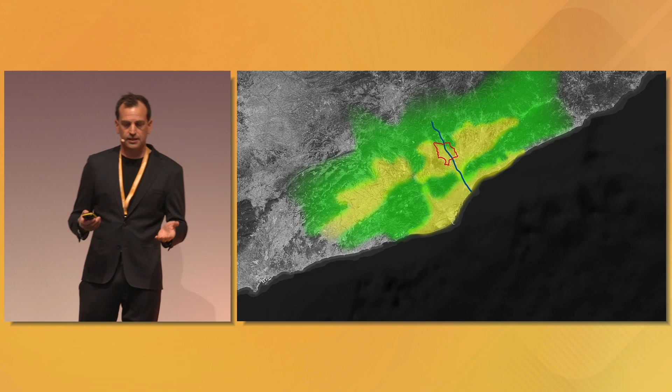It's in the depression area. This green area is a mountain range. Sabadell is placed in a mountain depression, flanked by these mountain ranges, so Sabadell has a special climate. Because of this, and because there's a lot of industrial activity there with high ppms in the atmosphere, the air has to be purified.

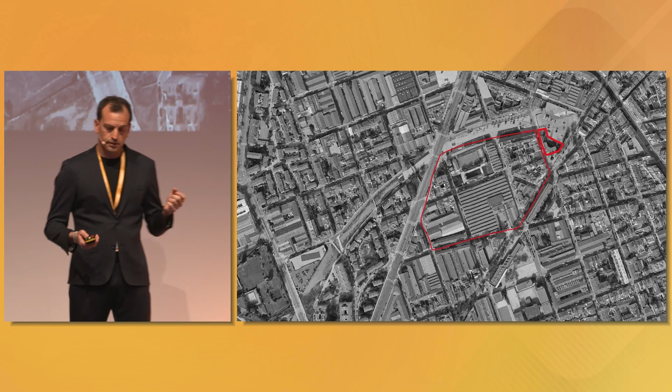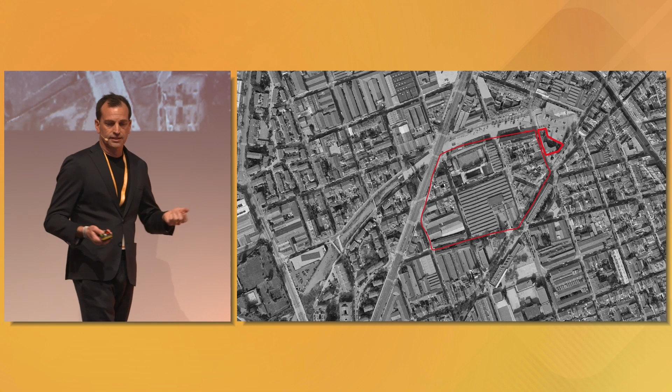If we zoom into Sabadell, I will explain the first radical regeneration of a public building for a social and cultural purpose. Let's start from the beginning. It's a rehabilitation project for the municipality of Sabadell. The small plot is the project plot, and the big plot was an old textile factory. Sabadell was known in the 19th and 20th centuries as the Manchester of Spain for its high activity in the textile sector. This is a historic picture of the factory, and this is our building.

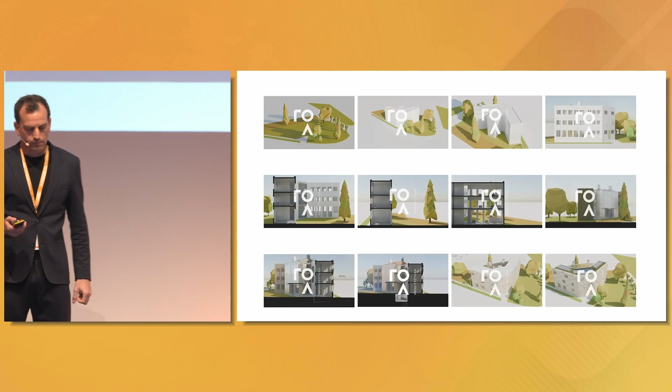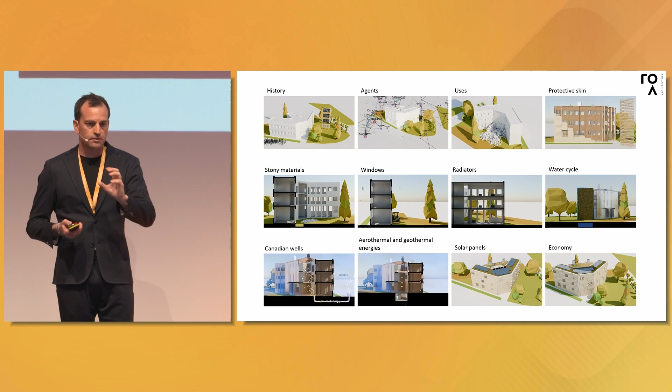At the beginning, this building was the canteen for the workers of the industrial factory. But then it became a school, and due to high demand, it had to add one story, two stories, and that's how we found it. In 20 years, it's the first time we're doing an intervention in a pink building, so it's a funny color for us. Let me explain the intervention to achieve a net zero energy building designed with circular principles, with 12 videos.

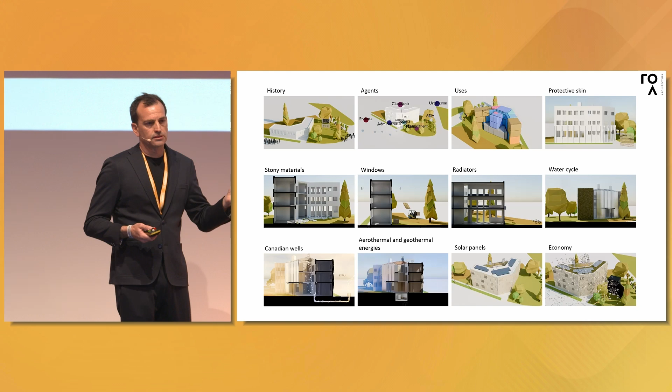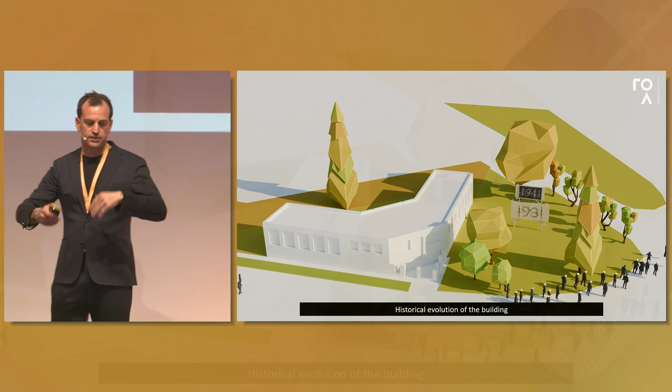The upper row is about the social aspects we have worked on, the middle row is about materials, and the lower row is about energy. First of all, its first use was a canteen, built in 1931, but then it had an extension of the central wing. After that, it became a school, and it added one story, two stories until nowadays.

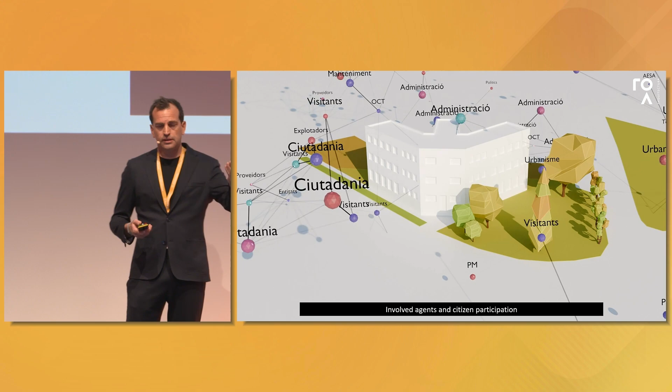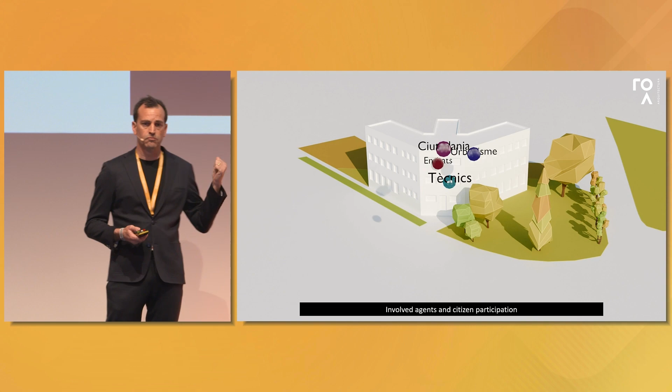Seven years ago, we were invited to participate in a national competition that we won. We won because we went further than the conditions and regulations set in the competition basis. After we won, we had to deal with all the agents involved in the process: politicians, technicians, urban planners, building planners, and airport planners as well, because it's close to the airport.

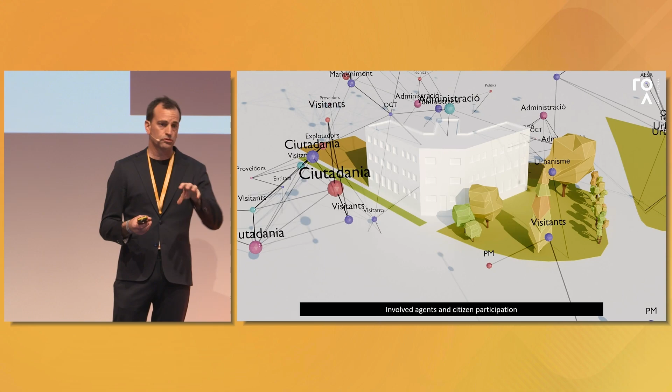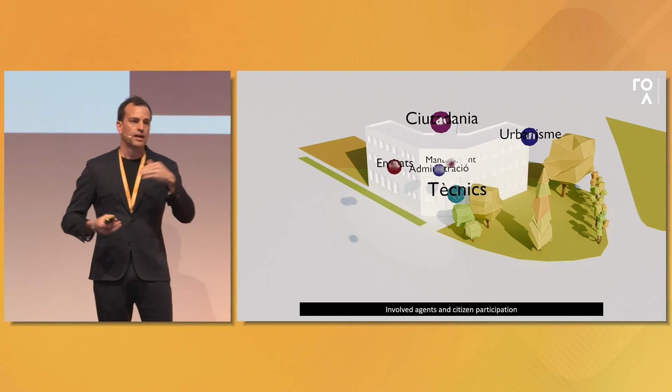We have to deal with citizens, because this building is for the social services to the citizens, but it's also used by the citizens during the weekend and in the afternoon. So it's a mixture of users, and we have to deal with all of them. And by having a lot of inputs, we have a more complex project and more probability to have success in

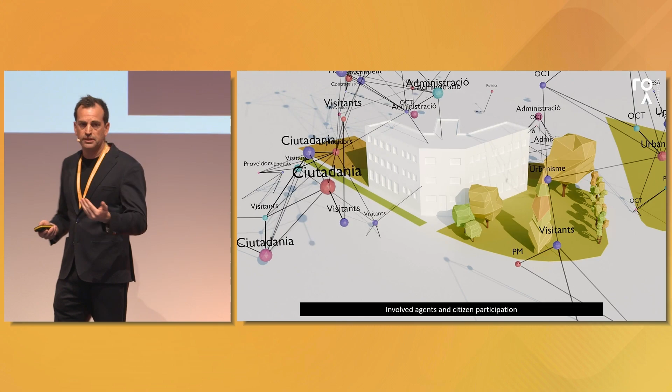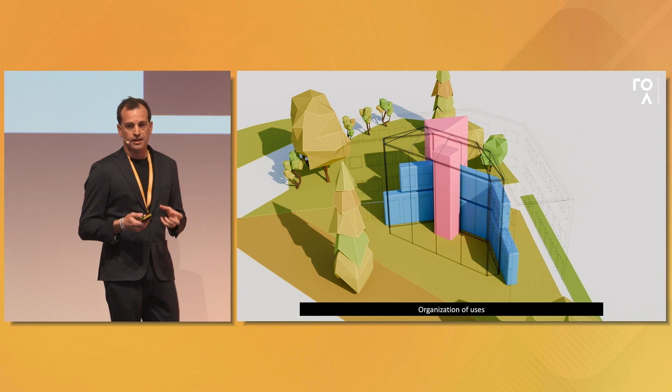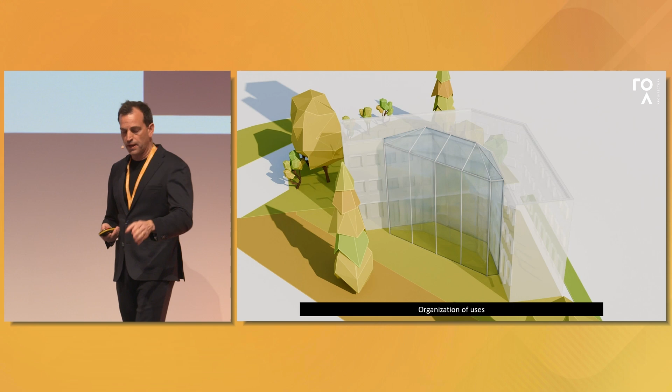the project. The first thing we had to do to have a net zero building was to organize it properly. We decided to demolish the central wing and put in a bioclimatic space, an atrium that organizes all the cores, with all the circulations around this area. Because of that, all the circulations were in the center of this building, and all the static work positions were in the surroundings. The first thing we did was to put the right uses in the right physical place of the building in order to optimize the efficiency of the building.

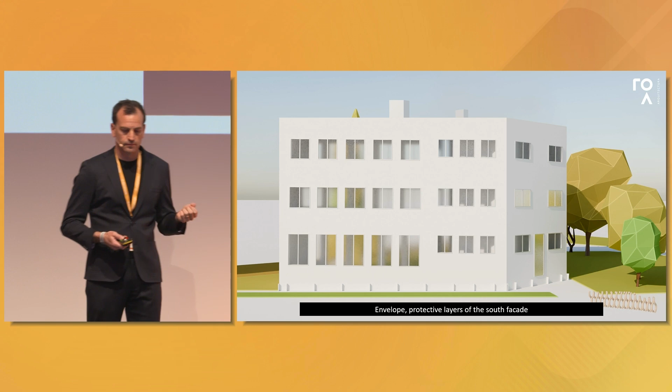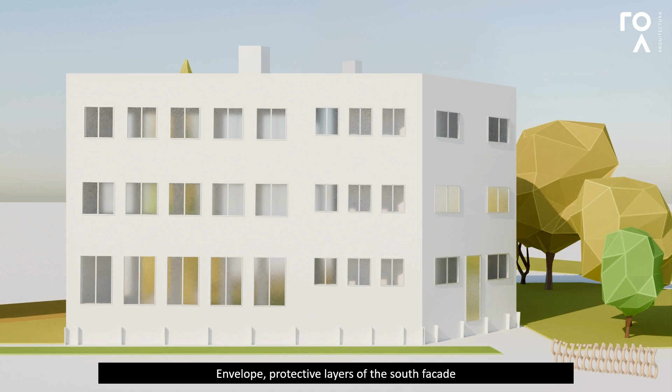As it was the canteen of a textile factory, we proposed a metaphor, because the factory was called Can Marcet, and it was especially known for the fibers it fabricated, which were very thin, long, and very resistant, to make specific clothes. For this metaphor, we propose an envelope, a vest, made of wood fibers that would give these new conditions to keep warm the people and the citizens inside the building. So we weave this new envelope to protect them from the weather.

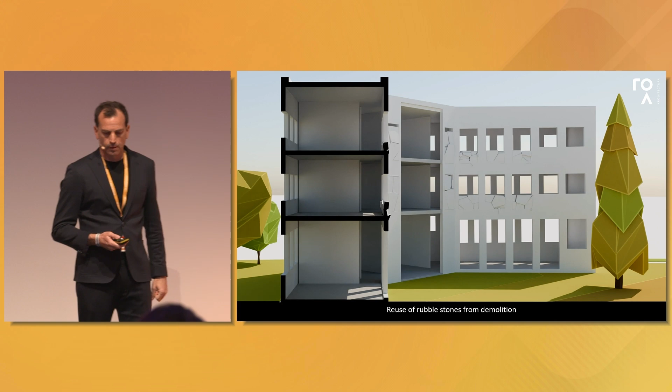After that, we place the right uses in the right position. We do the right envelope in the south, southwest and southeast to protect from the sun. We are in a Mediterranean climate, so we have overheating. And in terms of material, what we propose is to use all the waste from the demolition process as raw material in the new building. So that's what we are doing. We demolish all the ceramics, all the concrete, and we reuse it in the underground, in the sub-bases of the building, and in the urbanization of the surroundings.

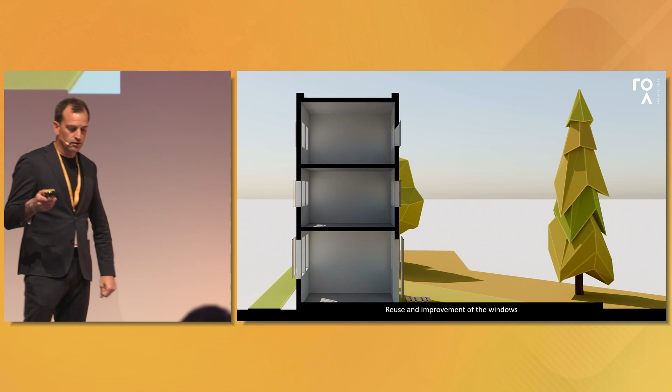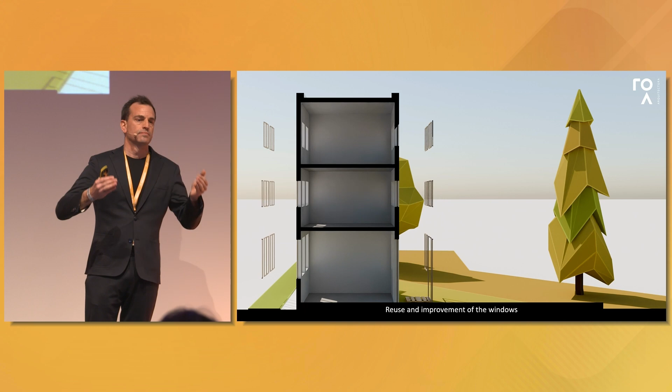Another thing we did in terms of materials is the carpentries. The carpentries were made of wood and in a good state of health, but very thin, and we had to add new wood according to the building regulations. As well, we found that the monolithic glasses were in a really good state of health. So we took the glass from all the existing windows, cleaned it, brought it to the industry, and with these monolithic glasses they constructed the new windows with an air chamber in between.

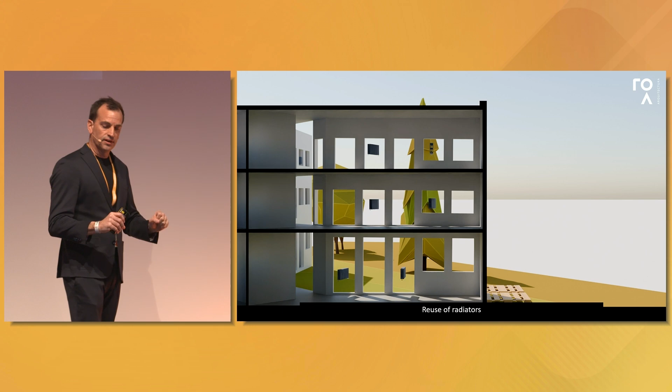So what do we manage with that? Normally these windows have four layers of glass, of which two or three have been reused. So it means that 75% of the CO2 emissions and the megajoules of energy embodied in the windows has been reused and saved. As well as the radiators, these iron heavyweight radiators, which we use as railings in the central space, and as bicycle parking in the urbanization. And these railings made of radiators also serve to activate the main space in the peak of summer and in the peak of winter.

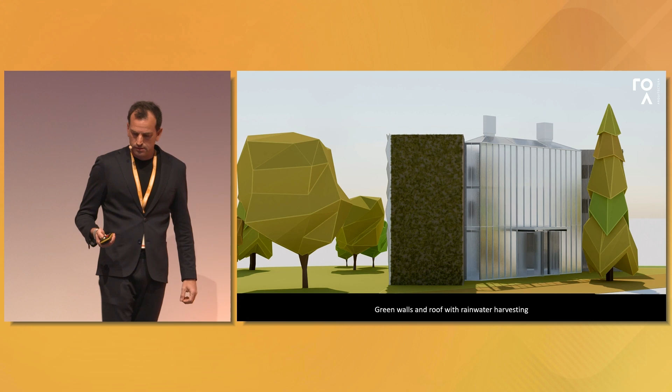Could you restart, please? Let's see. OK, now it's going on.

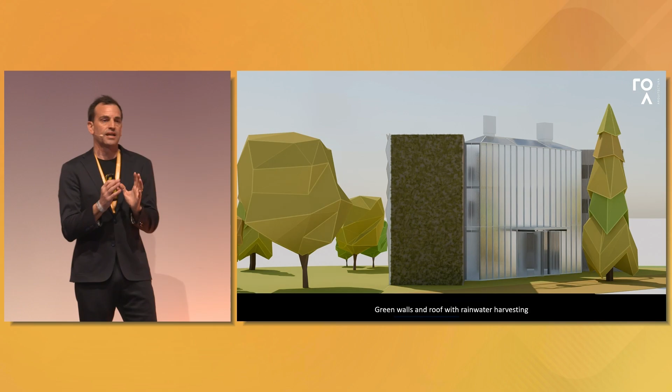In terms of material, what do we do with water? We harvest all the rainwater and put it in tanks underground to irrigate the green walls oriented to the northeast and northwest of the building. That's what I was telling you at the beginning, that the climate in Sabadell has a lot of PM. So we use these green walls to purify the air that we will inject into this central space.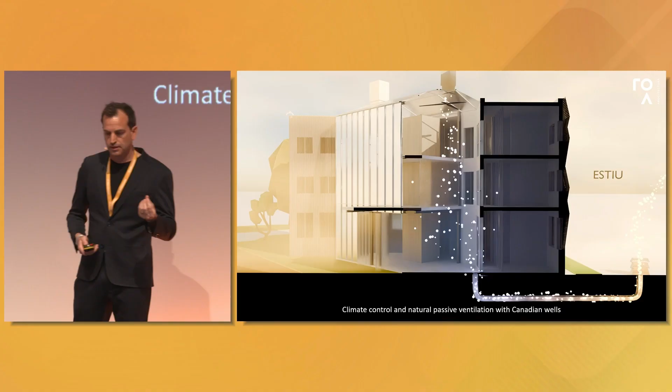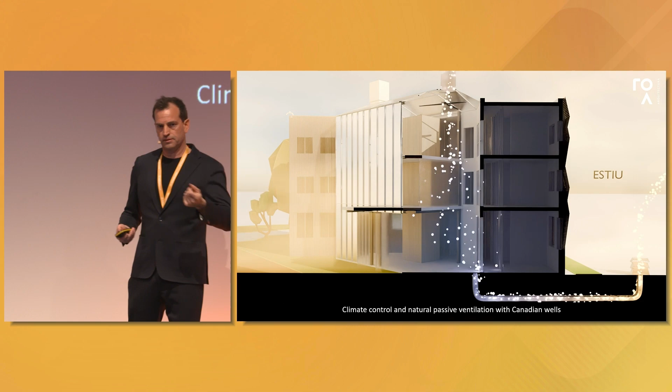In terms of reducing the demand, what we propose in this central space is to generate a bioclimatic space. So we introduce the air through the green walls to purify it, and through these Canadian wells we put it into the main space, and with some solar chimneys we regulate the thermodynamics of this space. What do we manage with that? 35% of the circulation areas are climatized with passive systems.

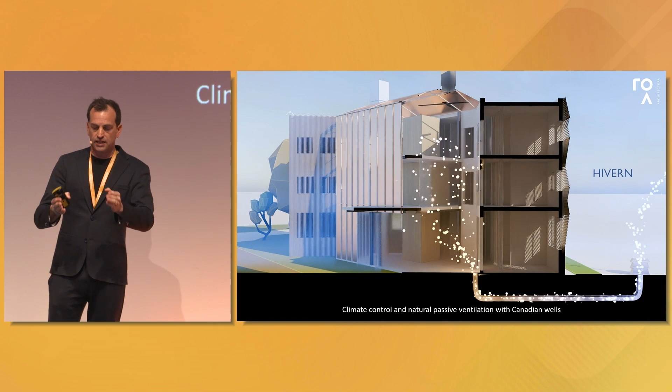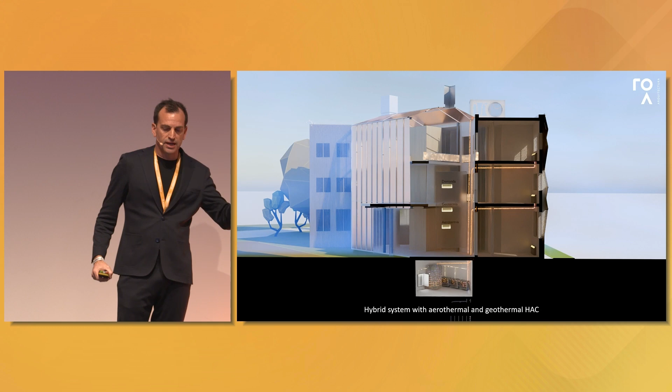So almost 35% of the building has no consumption. And then this 65% we have to attend. It's covered by a combination of geothermal and aerothermal systems, an intelligent system that chooses according to the outside temperature and inside demand. It chooses the system that has the most efficient performance in each moment during the day and during the year.

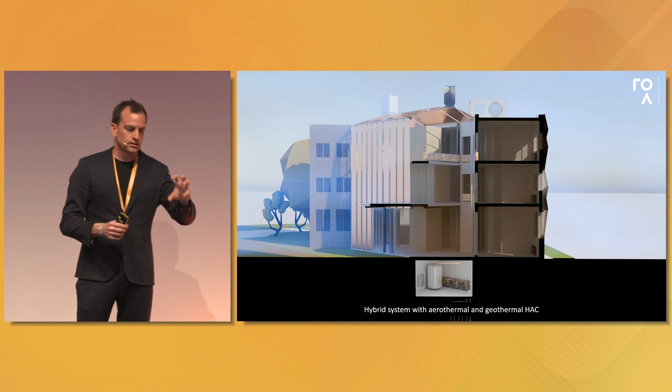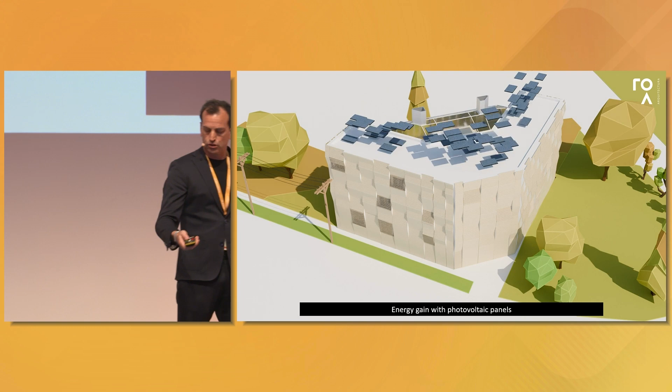So we reduce the demand by introducing this bioclimatic space by the envelope in the south, and then we have 65% only of consumption, and this consumption with very efficient systems. And these small consumptions we cover with solar photovoltaic panels on the roof, so managing the net zero building in the municipality of Sabadell.

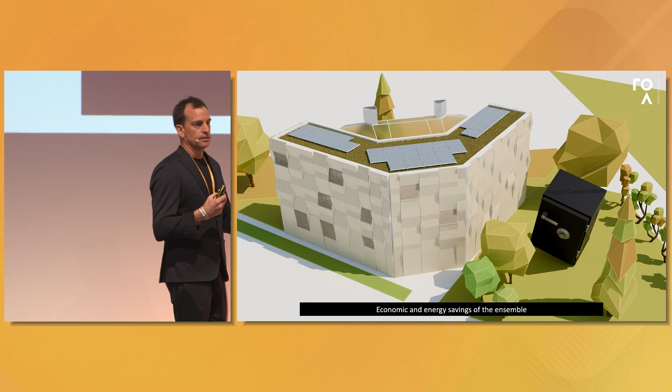Maybe you can say, I know, geothermal, aerothermal, bioclimatic space, solar chimneys, Canadian wells, it's expensive. Yeah, in terms of initial investment, it's true. It has an increase of investment. But what do we manage with this? In 50 years, the savings, according to the reduction of consumption, will be 1.2 million.

Plus the Next Generation fund, 1.3 million received, it's an amount of 2.5 million, and the building cost is 1.8. So we have left 700,000 during 50 years to the society and to the citizens of Sabadell. And with these savings, all the schools around this building will come and see and learn and be educated in sustainable aspects and in circularity, and they will see how this building performs in terms of production and consumption.

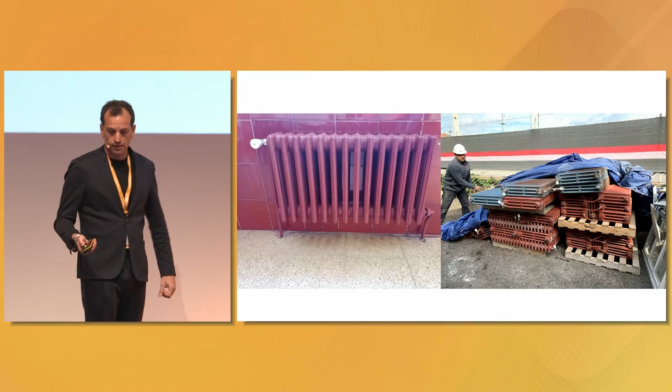And instead of leaving an energetic mortgage, we leave an investment fund to the city and citizens of Sabadell, and we are happy about that. This is not a utopia. This is a reality. So this is when we were palletizing the radiators. We did the same. We did the inventory of all the windows, all the carpentry, all the glass.

And this is the waste of all the old pavements that we have crushed. So we brought the waste plant inside the plot, and we demolished them. This is the first demolition process, and we had different diameters, and we could select these diameters to be used in the building in different places. We reused it in the urbanization of the building, and as well in the sub-bases of the building.

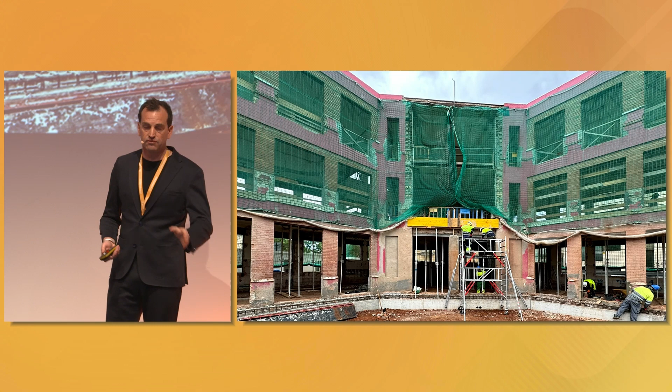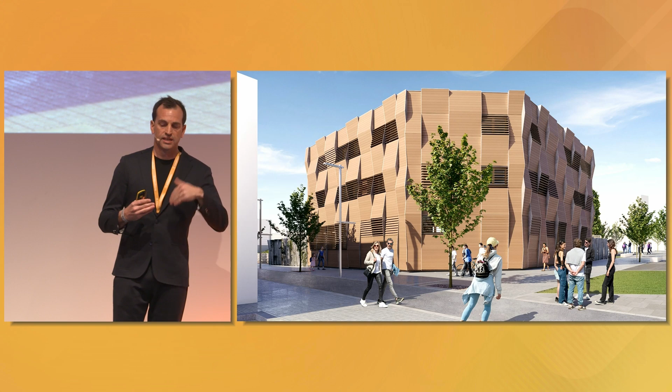This is how it looks nowadays. We have to finish in December of this year, 2025. We have not much time, but we have to hurry. And this is how it will look. And with these long fibers made of wood that protect from the south sun, but allow in winter the sun to come through and climatize in a passive way.

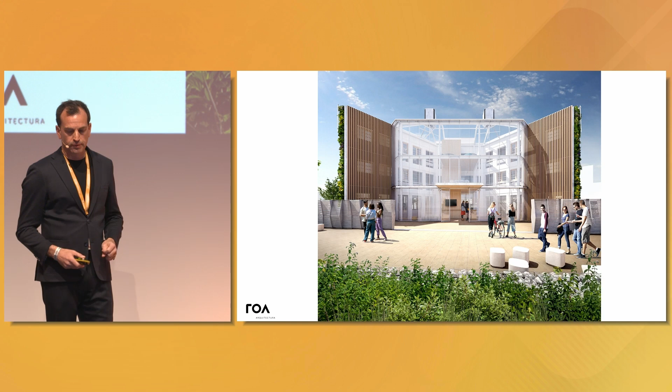This is how it will look. This, in fact, was the rear part that has become the front part, with the solar chimneys on the top, and with the bioclimatic space and the green walls on both sides. And this building responds to the use because it's open to the north. We want to work with indirect light. We don't want to light with energy during all the day if we can avoid it. Yes, we can avoid it.

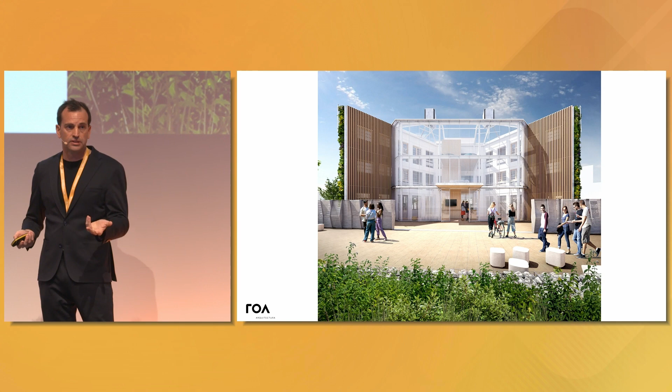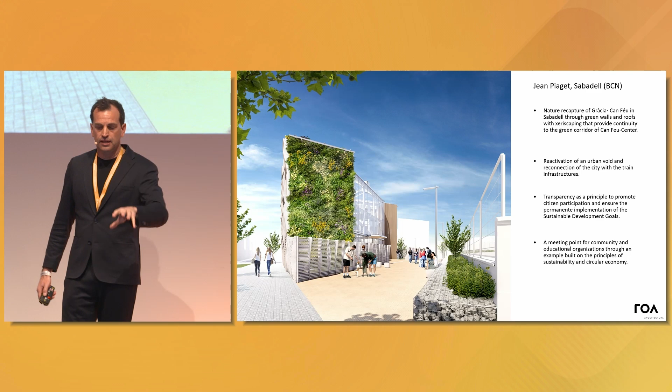This is an image with the green walls, and we go for the proliferation of biodiversity. We reduce the temperature of the surface of the buildings, and it also emphasizes the transparency of the building, a common building that will be used for educational purposes and to reactivate this area of Sabadell with the principles of sustainability and circular economy.

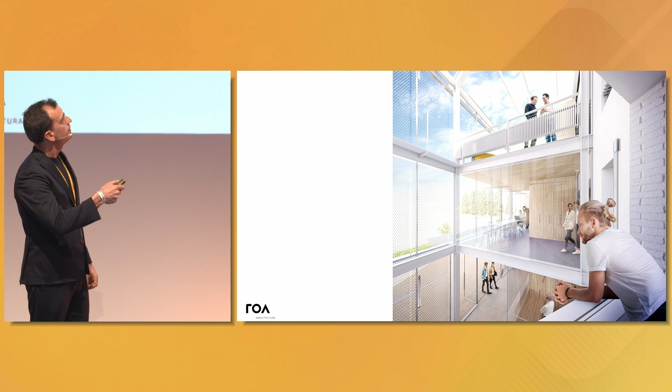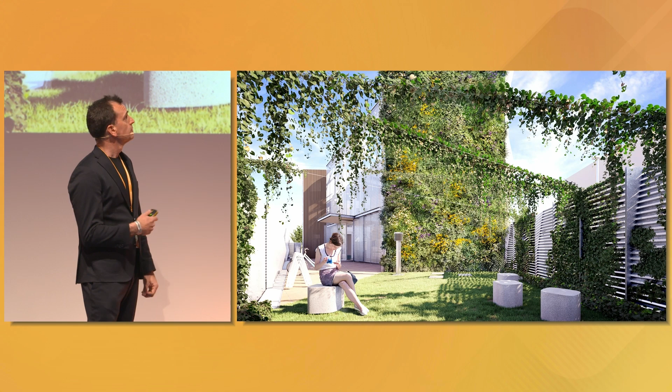This is the main space. You can see here the radiators, and it was a funny situation with that. These are images of the inside. And this is where to have a coffee break while you are working in the municipality. And you can also see these elements to park the bicycles, and the green walls and the atrium.

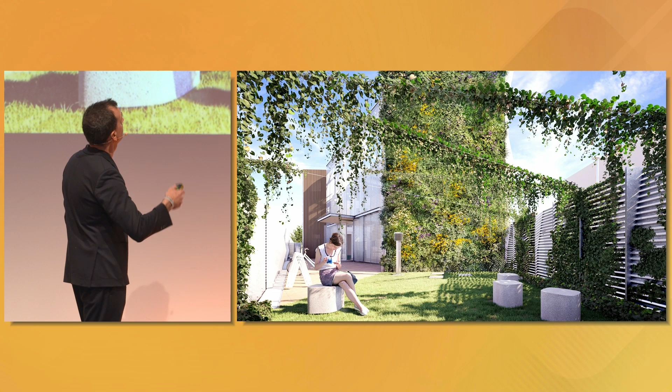The second project I will explain to you is in the private sector. It's with the same philosophy, with the same purpose, but this time we are in the north part of Sabadell. These are the plots; more or less, it's one and a half football fields. It's 10,000 square meters of plot, and it was an old industry as well, of the textile sector.

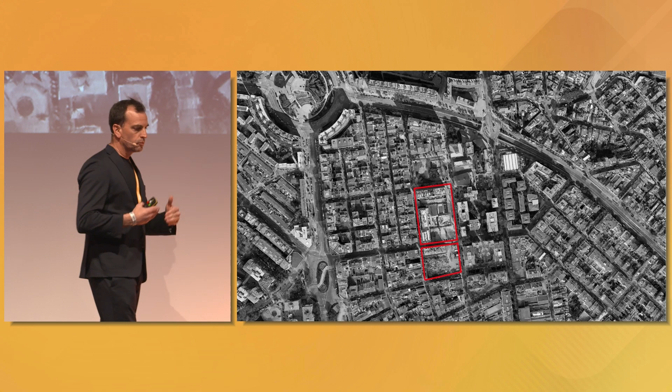It closed in 2006. And they wanted to urbanize and requalify all the space for residential purposes, private and social housing, public facilities, and with a new plaza, with a new Rambla that they wanted to project. The building wasn't in the inventory of the architectonic heritage of Sabadell. It didn't have a very high architectonic quality.

But what we were thinking before starting the project is: what's the real value of these 10,000 square meters of gross area? It was the material. Then we thought that if we use all the waste material of the demolition process of this building as a raw material in the construction of the 175 dwellings, it would be very nice. It's what we have done. This is the selection process. We have the selection of irons, stones, concretes.

And what we did, we brought the waste plant onto the plot, we demolished it, crushed it, and as a result, we achieved different diameters of different materials that were used in mortar, non-structural concretes, and sub-bases of the pavement of the urbanization and in the basement of the building.

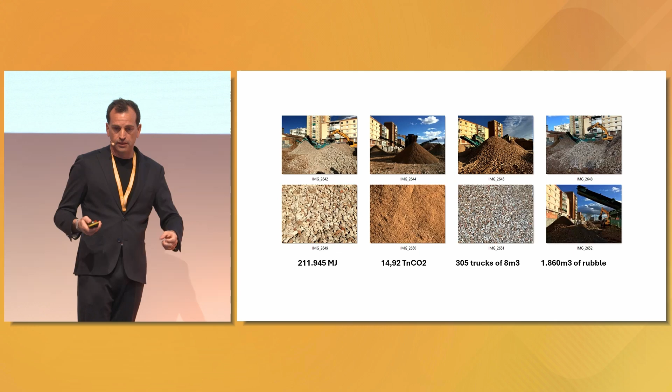Because of that, we have savings of 211,000 megajoules of embodied energy avoided, as well as a 30% reduction in the cost of the demolition process, which is like 150,000 euros, and 15 tons of CO2 avoided to the atmosphere. And as well, 305 trucks driving through the city, generating dust, generating noise, that did not get out from the plot. So the mayor and the municipality have been very happy to deal with this kind of intervention.

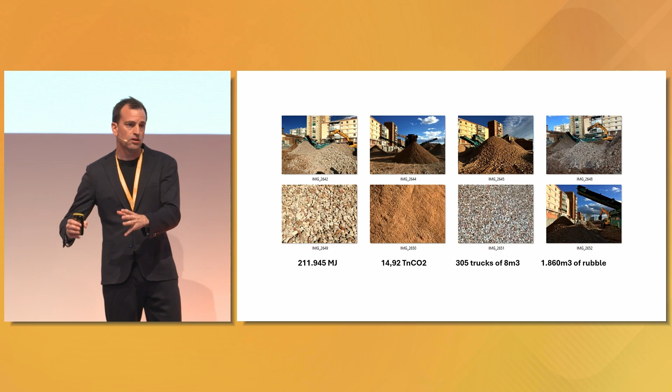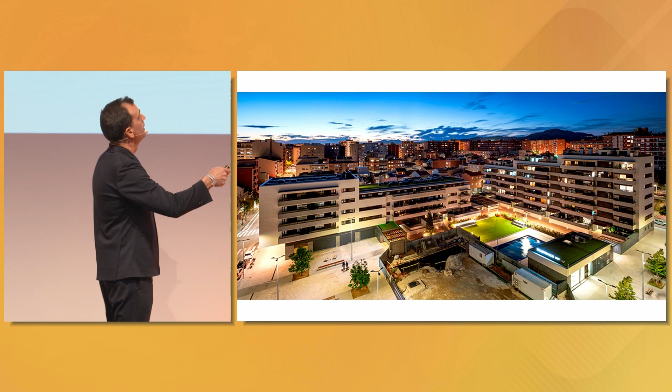Okay, it's true, we had enough space to put a big mountain, more or less 50 meters in height; we made some small mountains in terms of different diameters. This is a part. It's quite a serious building, but it's been made with these materials. That's the point, that's the interesting thing. Here we have the social building as well, made of wood. And here is the plot we are currently working on, where we've done as much as possible in reusing the materials of the old industrial buildings.

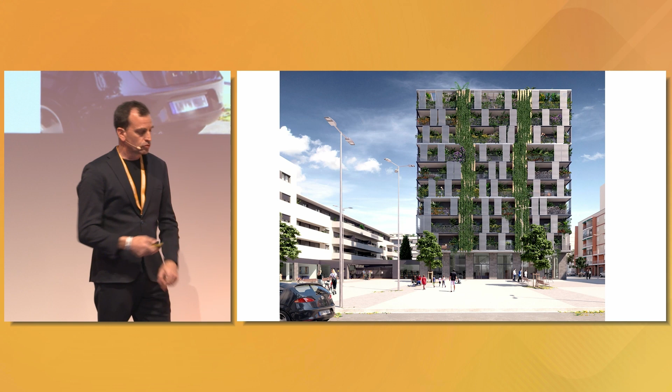But we've done the same in the tower that we are constructing with aluminum. We have reused all the aluminum cans of Coca-Cola, Fanta, Schweppes, and we have melted them in a big oven, constructing big blocks of aluminum, and with these blocks we have laminated these coils that have been used to construct all these mobile aluminum louvers in this building. So these are small interventions with big results.

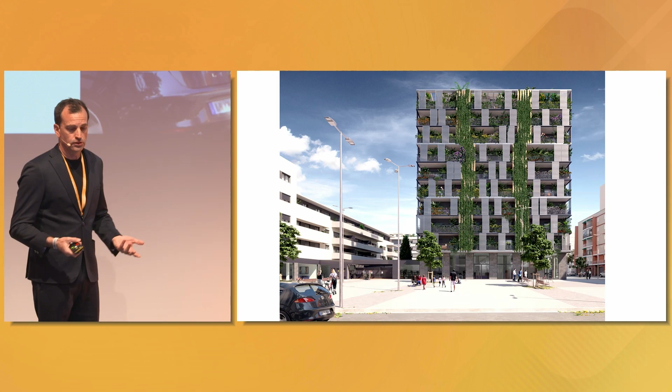It was about rethinking the reuse of this public, social, and cultural building to reactivate this plaza. It was close to the Romanesque church of the city. It's the main plaza in the city, and we were asked to think about this. We follow the same rules. I'm not going to extend on that; it's the same philosophy that I explained to you.

So we work on the passive systems that enhance the quality of life of the citizens working there, because they have very high quality of light and ventilation, but it's not actively climatized. So it's natural ventilation. It's easy to be there. And then, as well, we work with a new envelope. We have overheating problems in the Mediterranean area. So we create a new envelope.

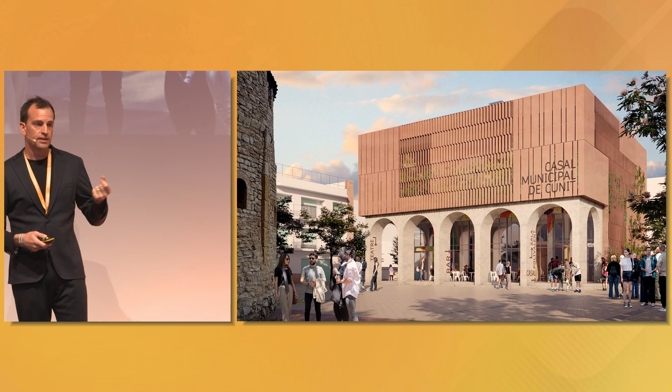What material do we use in this new envelope? We took all the tiles of the roof and put them as a finish on the facade, as a cladding and as a shadow envelope. That's an image of more or less what it will be. Nature will colonize this building. It's currently ongoing. We have to start the building works next month in March, and it will be finished in March next year. This is how it will look at night.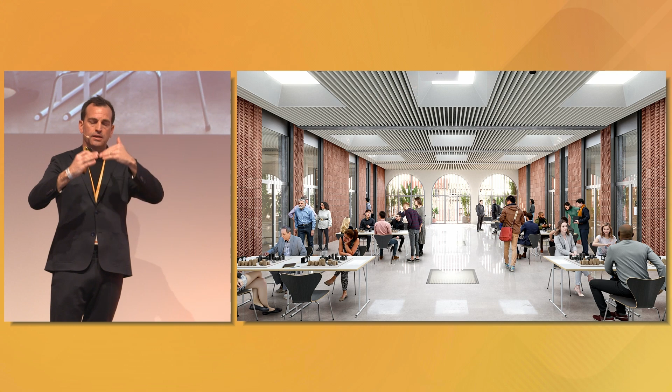And this is how the upper floor looks. We reversed the program because the theater was on top. But for the theater, what you need is this: no light, no natural light.

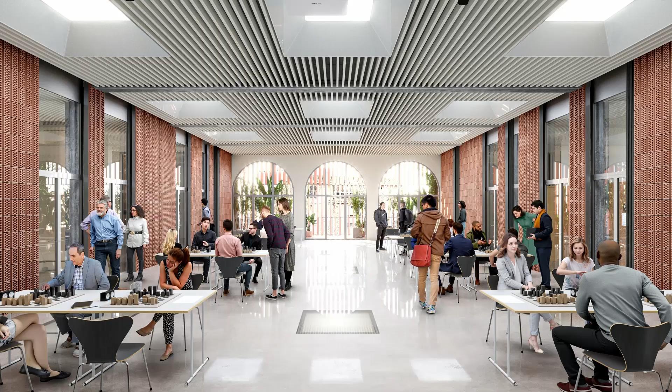So we put the theater underground, and the multipurpose space is this one on top, with views of the Romanesque heritage that is here, with natural lighting that comes through the upper part down to the ground floor. So our work has been how to bring the natural light down to the ground floor.

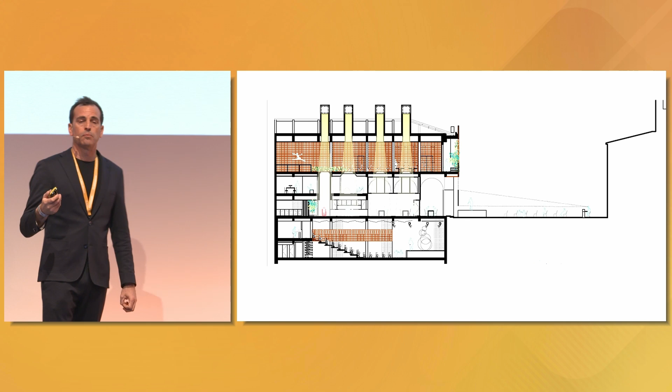This is the section. It's a small section. These are also solar chimneys that regulate the thermodynamics from the Canadian wells that we are constructing here. It goes through the solar chimneys and regulates the thermodynamics of the building, as well as these spaces that generate evapotranspiration of the plants to enhance the experience and the ventilation of the building.

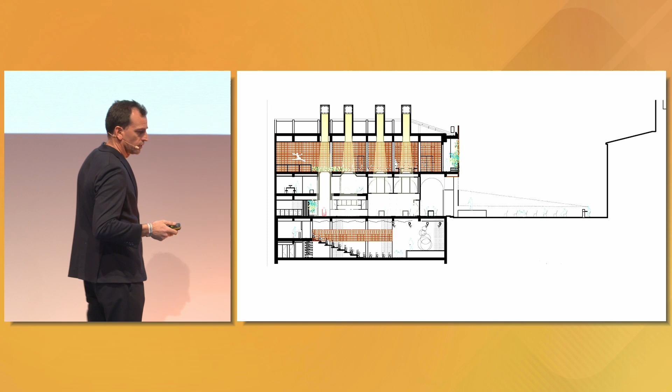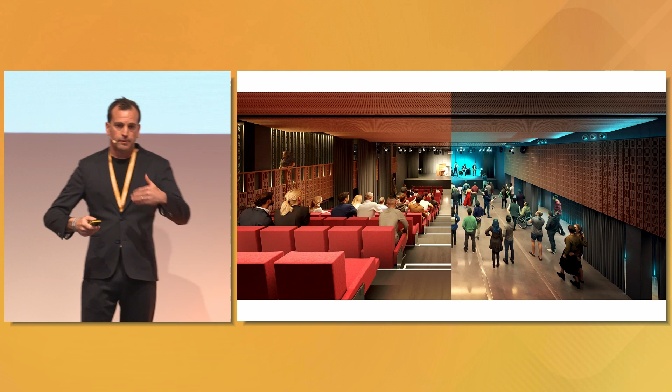So we put the theater underground and the multipurpose space with views to the church, and this is the program, with a strong interaction with the city, as it also acts like a stage for events in the outdoor space. These multipurpose spaces have retractable bleachers that can be used in both atmospheres, with all ceramics reused: the small bricks, ceramics reused from the demolition of old farms.

And I'm going to finish with one hybrid urban planning project in Sabadell as well. We spent a lot of years not working in Sabadell, but now we are currently working in this city, on the north side. This project is about how the artificial interacts with the physical, the intangible with the tangible, the physical and the digital, and how this interacts in the urban space to enhance the quality of life of people. And all this is around

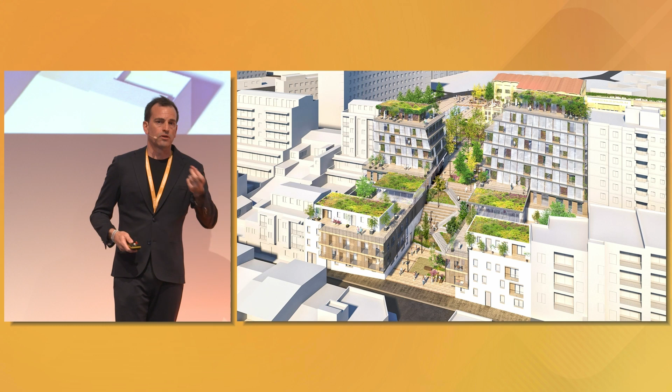an electric substation, for the Spanish-Italian client Endesa Enel, that has this factory. In fact, this is a big factory, and it's currently supplying energy to half of the city, 100,000 inhabitants. So we have opened it to the city. It was closed, and we reactivated the whole area around energy and water, and the interaction of people with energy. All the people around the building will be able to produce energy and know how much energy they are introducing into the grid while they are doing sport or enjoying the public space of the city.

All this is around new plazas, and it's connecting the upper part of the city. Here we have a neighborhood, and this is another neighborhood. We've got 9 meters of level difference between the upper neighborhood and the lower neighborhood. So with this space, we have the residential program, social and private, with the facilities all around this corner. This is a view from the bottom with this quality of space. It's not only a space you go through, it's a space you can stay in and enjoy, with the solar protections.

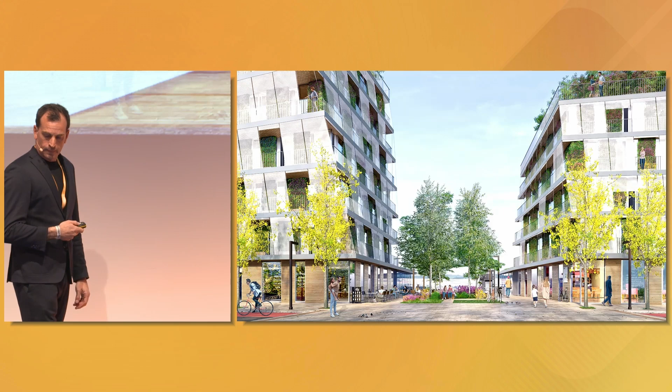And here is the building where we will put 100 workers for the electric company, and all this will be a co-working space for 100 more people. So it will be around 200 people working in this building, while it's still an ongoing electric supplier.

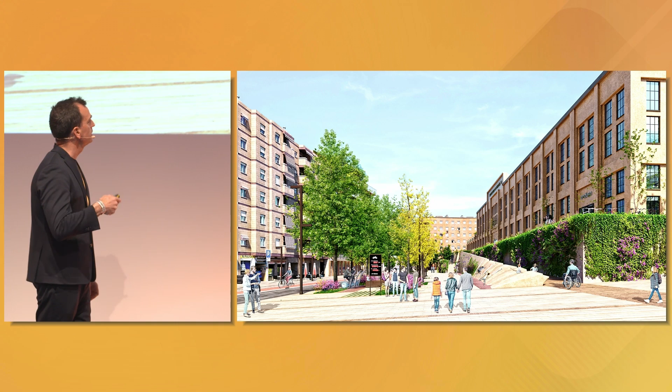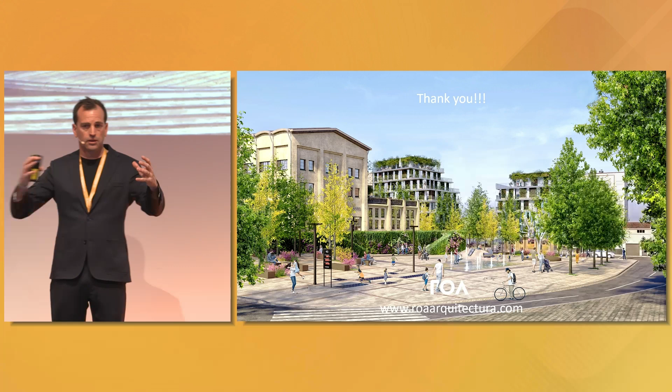What we have done as well is solve the universal accessibility with the playful areas, with these dynamic urban elements, and with the digitalization of these urban spaces that will allow people to enjoy this environment. This is a new plaza we are building, with a residential program and the industrial program that was closed. It wasn't even visible from the city, so we had to demolish all the walls around this building to connect it with the city.

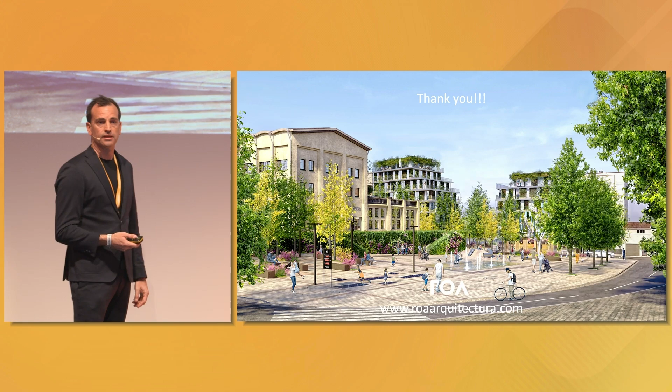And all these kinetic pavements around it show that energy is important, but the citizens and the quality of life of all of us is more important than everything. Thank you very much.